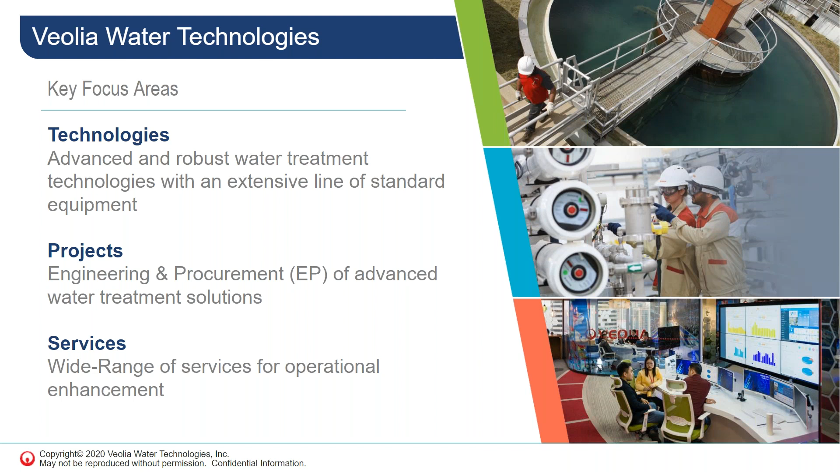And without further ado, I'd like to introduce today's panelists that we have here today to share their knowledge about the topic. Our first panelist is Christian Scott. Christian is the Director of Strategic Market Intelligence. In addition to that, in connection with Veolia's Centers of Expertise worldwide, he is also the Product Manager for the Actiflo family in Canada. He graduated in civil engineering from Polytechnique in Montreal with a specialization in water treatment.

And Christian Scott has also completed graduate studies in engineering project management. Prior to Veolia, he worked 11 years in consulting engineering, designing and implementing a wide variety of projects in municipal drinking water and wastewater treatments, as well as industrial process water and effluent compliance for reuse.

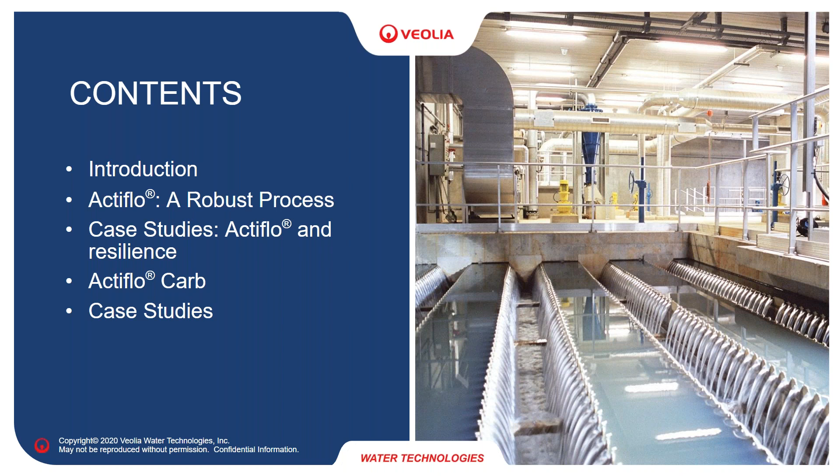We will start by looking quickly at some definitions of resilience and then go through examples where a proven technology with decades of experience in North America, the Actiflo, shows its relevance for these very modern challenges. I will, after, hand the presentation to Reed, who will present another member of the Actiflo family, the Actiflo Carb, that can provide additional solutions to go further in that mission.

Resilience. Wiktionary gives this psychological definition: the ability of human beings or a society to withstand a brutal ordeal and take advantage of it to strengthen themselves. What can this mean? How can we do this for a city? How can a city be more resistant to shocks, risks, particularly climate change?

Veolia was presented to you. Veolia has the specificity of being a company that's not only a technology company, but has a lot of operation experience for more than 165 years, being responsible for utilities in many places and operating them and sometimes even owning them. This is a very important question they had to look at. And one of the answers and one of the definitions they give is anticipating risks rather than just reconstruction, a logic of prevention, an ability to work together to make risk a growth opportunity.

Water treatment utilities specifically face different challenges. We see more and more floods that have a big effect on raw water quality, increase of solids, also organic matter. We hear in the news all over the world about forest fires that are more and more frequent and important, that have the same effect. We also hear more and more about the presence of algae, often together with their toxins.

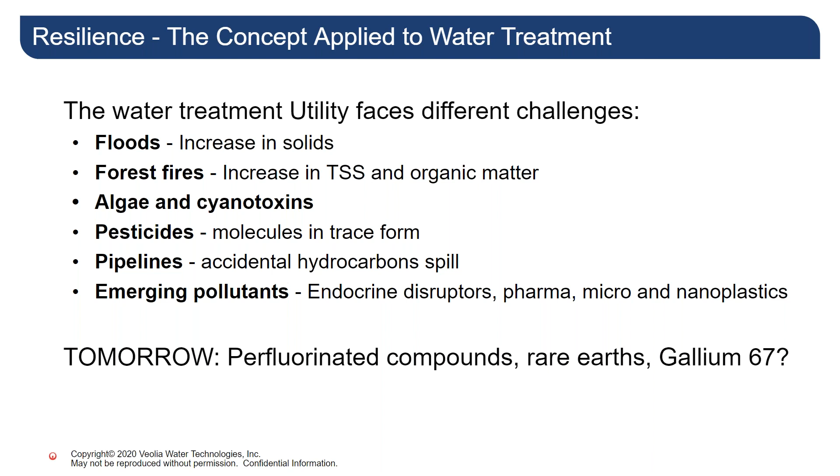And another way where resiliency is important to take into consideration, there is more and more presence of pesticides. There is risk of hydrocarbon spills from pipelines, and the presence of emerging pollutants, endocrine disruptors, pharma, micro- and nanoplastics. And we see more and more also PFAS, PFOS, rare earths. We're talking about more things that we will have to take care of in our water treatment.

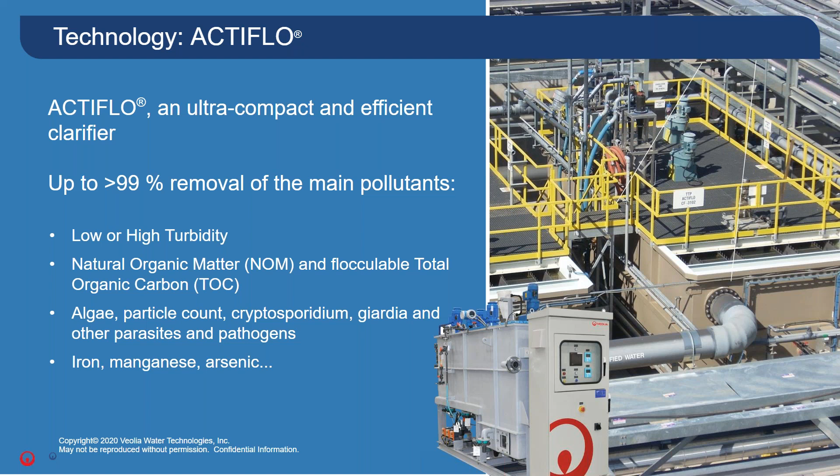Actiflo is a well-known process in North America and in the world. But I will still take some time to look at its specifics and see how it can relate to the question of resilience. The main characteristics of the Actiflo technology: we know its compactness, but also its efficiency, very efficient on a high range of conditions, and also its versatility, being efficient on turbidity, organic matter, and many other compounds. Let's take a little time to understand the technology as such. It's ballasted floc clarification.

The first step, which is a coagulation tank, or sometimes even in-pipe coagulation, is where the chemistry is happening. There, depending on the quality, on the type of water, the right chemistry has to be determined, often by jar testing, by piloting, or now also by experience, so that we get creation of flocs that are optimal at this step of the process.

This section is also where all the versatility of the technology is happening, because any type of chemistry can be applied to the technology. We are applying Actiflo in drinking water, wastewater treatment, wet weather treatment, and a lot of experience also in mining for metals removal, softening, etc. When the chemistry in the first step of the technology has been determined and rightfully executed, then the water goes to the second tank, the flocculation tank. Here, it becomes specific.

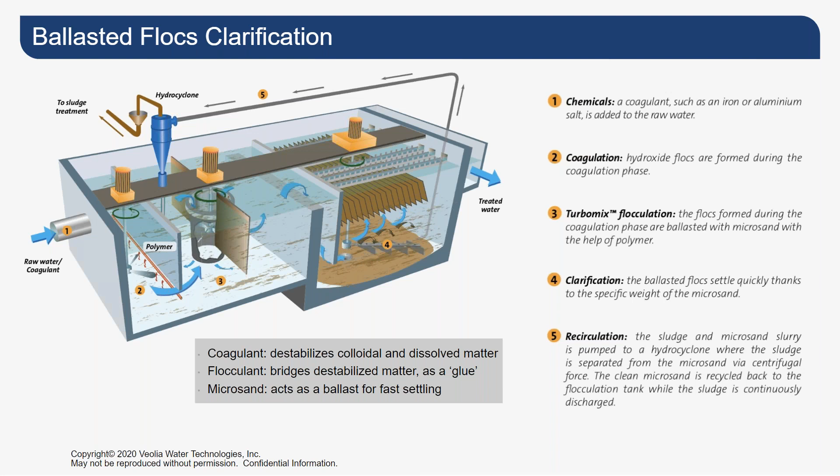The major advantages of the technology are its robustness, process stability. Because one thing I did not mention, in the maturation tank, you get a very high concentration of solids by the presence of microsand. The solids can get up to 5 to 10 grams per liter, 10,000 milligrams per liter. So if there is a variation of solids at the entry from 50 to 1,000, it's very little compared to the mass, the inertia of solids in the system, which makes it very stable.

Performance is proven to be very high in a great range of turbidity, TSS, and pollutants. And also, this system has very short hydraulic residence time. The first tank of coagulation is about 2 minutes or less. Flocculation, 6 minutes or 4 minutes or less. And very quick clarification. So the start and optimization of the treatment process is very quick. You start the system and you know in a few minutes what the result will be, and if the chemistry needs to be adjusted in case of a sudden change, let's say, of raw water quality.

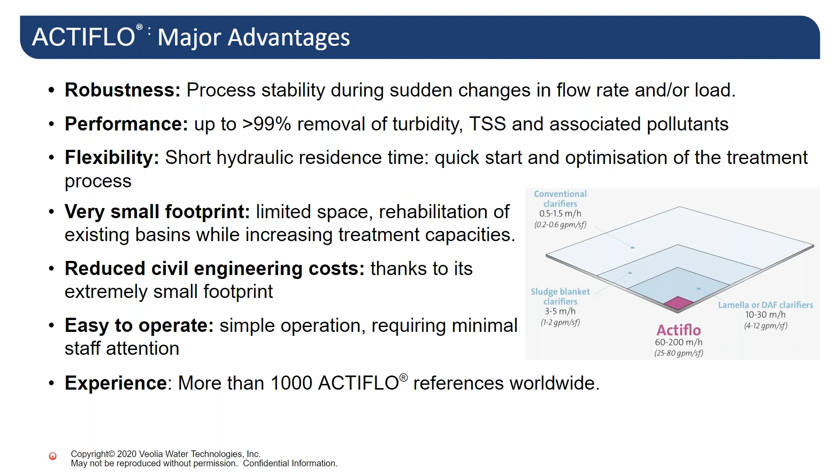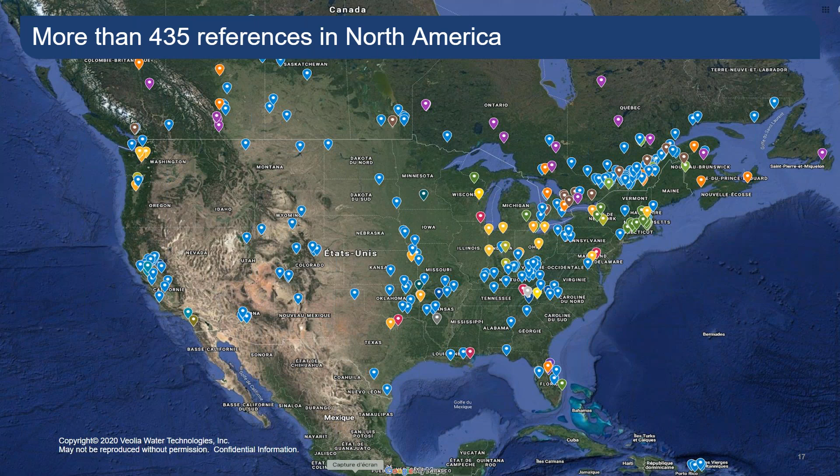When we are talking about the robustness of the process and the link to climate change conditions, one of the first, if not the first, climate change impacts I listed earlier were floods. Well, Actiflo has had the occasion to show its performance during many floods in Canada and in the United States. I put forward the example of the city of Red Deer, which is a medium city in Alberta between Edmonton and Calgary, where there was very important flooding in 2005.

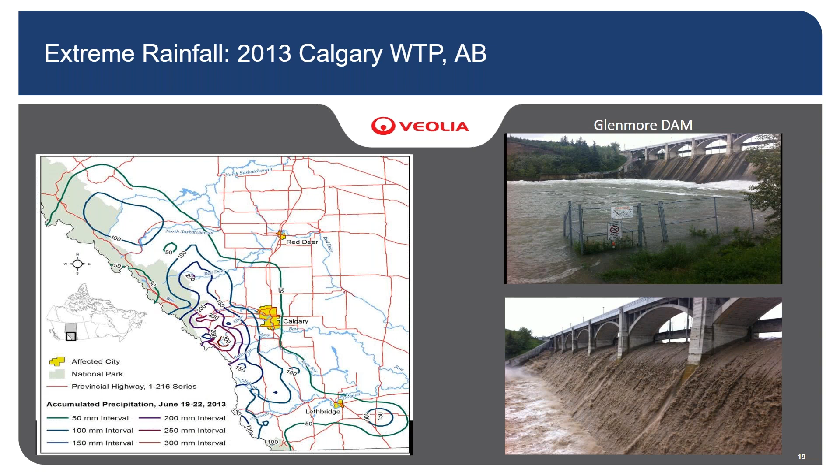During that time, many of the plants in Alberta were shut down because of the bad raw water quality. It was just at that time that the city of Calgary decided to install Actiflo technology at its two drinking water plants of Bearspaw and Glenmore. It was, I think, a good thing, as here you will see there was another extreme rainfall in 2013. And on the right-hand side, you will see the water going over the Glenmore Dam. The water ahead of that dam is the raw water for the Glenmore plant. So you see the color, the quality of that water.

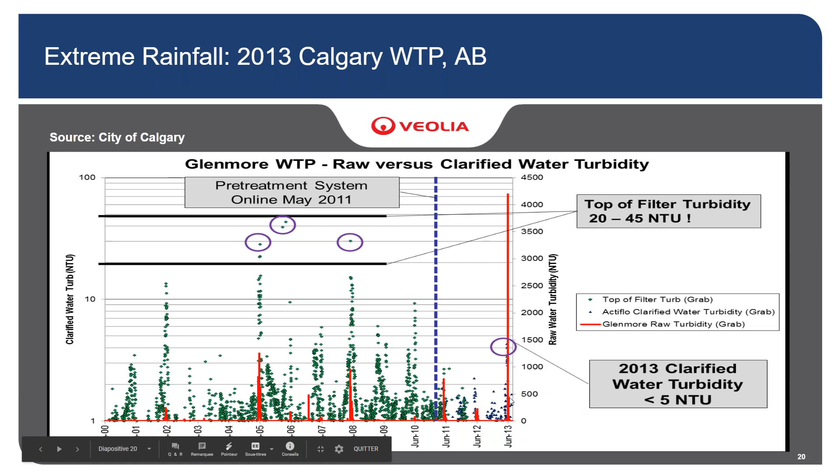Another example of the Actiflo robustness in link with climate change impact: wildfires. You maybe heard about the 2016 Fort McMurray wildfires. Fort McMurray is the oil town for the oil sands in northern Alberta. A third of the city burned down in 2016, with a dramatic effect on the water quality. Not only that, everybody had to evacuate the city for a very long time, and it's the event that had the most damage in the history of Canada.

Even with the raw water very much degraded, the city was able to operate at 150% of the design capacity for the fire fighting. Now we see that the Actiflo had a very good response to the dramatic increase in solids, which is one of the effects of a wildfire on a watershed. We also know that in the short and long term, there is an increase of dissolved organic carbon in a watershed that has been affected by wildfires.

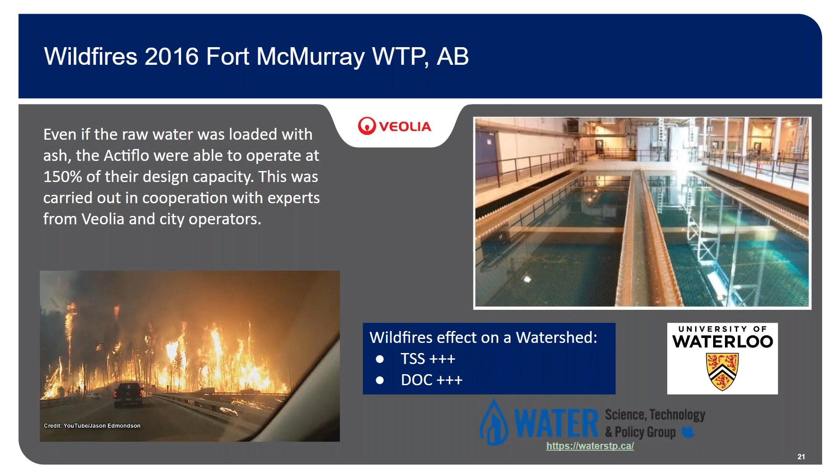We are currently participating in a study of the University of Waterloo that is looking at the best ways to treat water after a wildfire. We have had some tests on the solids and are looking forward to testing activated carbon to complete. The first set of results will be published by the Water Science, Technology and Policy Group, and you can look for that coming soon at the address in the presentation.

2016, in Saskatchewan, a pipeline oil spill at the city of Prince Albert, which is equipped with Actiflo. In a few days, the city had to change water source from the North to the South Saskatchewan River, with pipelines of raw water going to the plant, with a dramatic difference of quality between the two rivers. With the Actiflo, they were able to optimize the chemistry and get the same water quality for the city during the time that the normal raw water source was cleaned up and ready to be switched to a bit later.

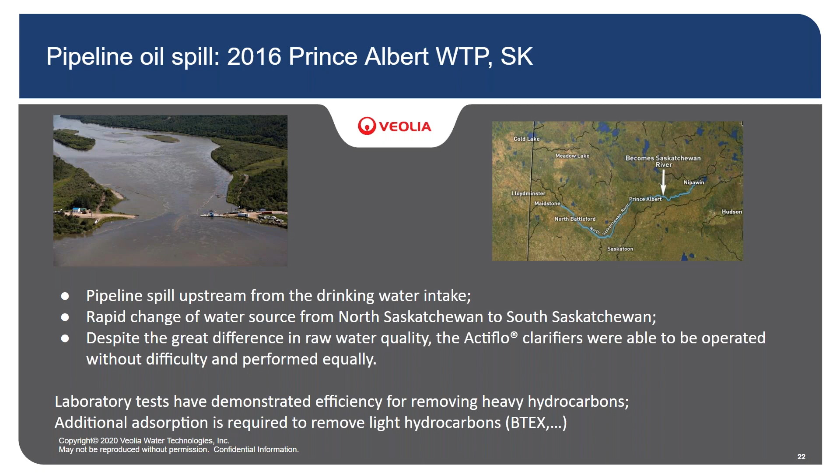During that time, we've done some lab tests on hydrocarbons removal, and we could validate that the Actiflo was very efficient on removing heavy hydrocarbons, because that spill was of heavy oil. However, we know that Actiflo, as any clarification system, will not remove light hydrocarbons like BTEX. Here again, adsorption could come and help for that.

Algae: we have experienced north of Montreal a very high bloom of algae in 2005 because of a dam that spilled a sudden quantity of algae. All the plants on the river had difficulty producing the quantity of water, and some were shut down. But the Actiflo we were testing for government approval at one of those plants that was shut down had zero effect on its operation.

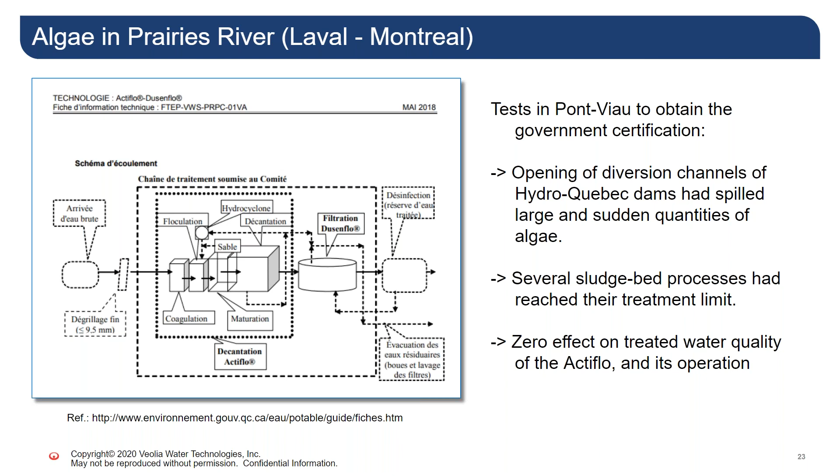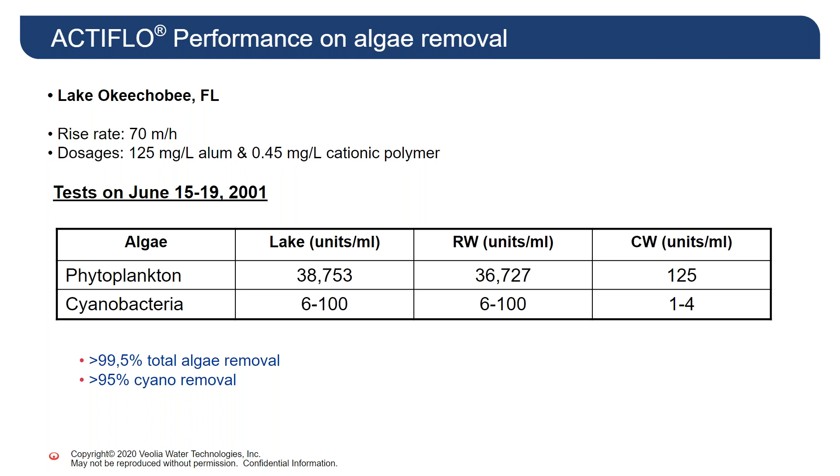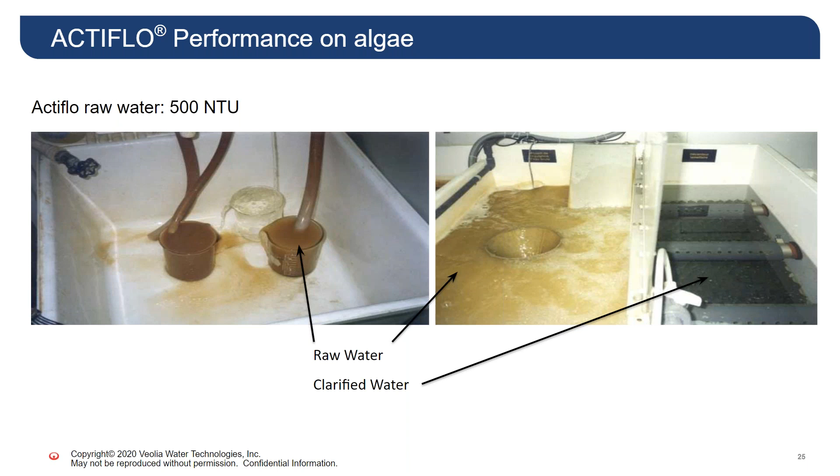Algae removal is one thing. We also have to think about cyanobacteria toxins; there might be toxins coming with the algae. We know that Actiflo and membranes will remove algae.

We know that Actiflo and DAF have a very high water production security. Sometimes membranes may show a decrease in the fluxes, and for the worst blooms even have problems continuing functioning for some time if not attended to as they should.

We also have to think about toxins that come from cell lysis. There is research showing that in sludge blanket technologies where there is a high concentration of cells, this situation may favor the lysis of cells and release of toxins. In some membranes too, other studies show that the pressure on the membrane may also favor cell lysis. We have to be very careful about this element in design.

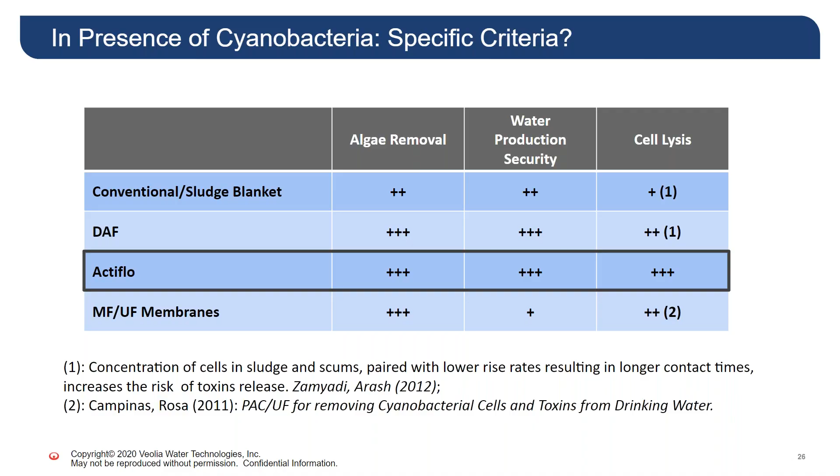For the Actiflo, the cells will be removed through the hydrocyclone and eliminated very quickly from the system. But here again, the Actiflo will not treat the toxins for sure. So there are other processes for that, and here again, PAC and adsorption are a good solution. So this brings us to the moment where I will pass on the presentation to my colleague Reed, who will talk to you about Actiflo Carb, which adds adsorption to the system.

Yes, thank you, Christian. Staying with that theme of resilient technologies and shifting focus to Actiflo Carb. For those of you not familiar with Actiflo Carb, it is a combination of Actiflo and all the benefits Christian just talked about in terms of a robust, very adaptive technology, combined with the adsorption capabilities of powder activated carbon. Powder activated carbon is well known for its efficiency in removing things that are typically more challenging to remove through just coagulation and typical water chemistry alone.

Some of that focus is on the lower molecular weight organics, algae, and especially the toxins, as Christian alluded to earlier. PAC is very adaptive in removing those toxins, taste and odor, pesticides, hydrocarbons. And powder activated carbon is very efficient in terms of emerging micropollutants as well: personal care products, pharmaceuticals, EDCs, things present in our watersheds that we don't like to talk about, but carbon is very effective in their removal.

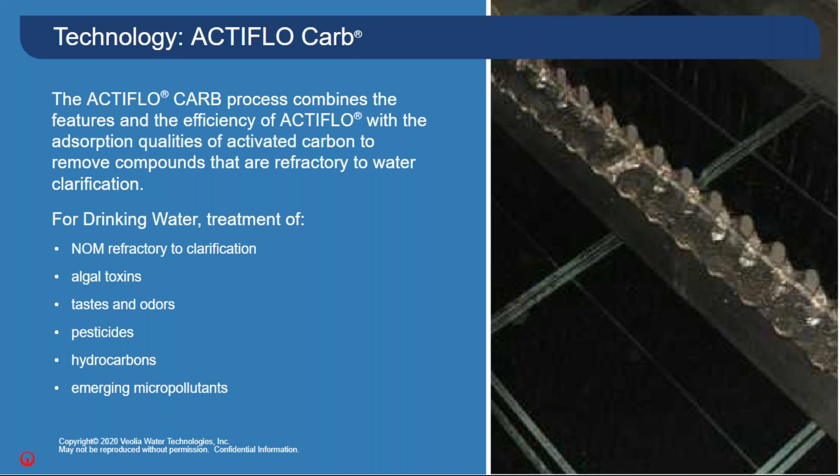So how does Actiflo Carb work? How does it combine these two technologies? Taking the PAC dose upstream, putting it through an adsorption tank upstream of the ballasted clarification process, including a PAC recycle, which I'll talk a little more about. The combination of those two affords Actiflo Carb a more effective use and a continuous removal of those compounds compared to once-through carbon systems, where carbon is dosed, passed through the process once, and then removed. So Actiflo Carb combines an adsorption tank and a recycle of that carbon to fully utilize and maximize the adsorption sites of the PAC.

And then just like ballasted clarification and Actiflo, those PAC particles are coagulated, flocculated, bound to that microsand, and settled out quickly and efficiently, allowing for a very high throughput in terms of gallons a minute per square foot, and a very compact footprint as well.

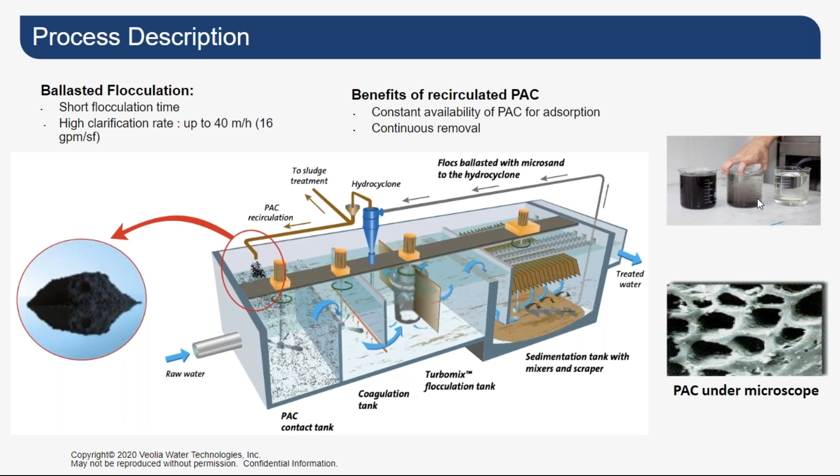And why does it work? Actiflo Carb inventories a very large amount of carbon. Typically, based on the application, it maintains about 1,000 to 2,000 milligrams per liter of carbon within the system. This large inventory, along with the adsorption tank and its residence time, including PAC recirculation: as the ballast drops out with the PAC, we separate the ballast, return it to the Actiflo portion of the process, and the carbon is reused and recycled back to the adsorption tank. Oftentimes this results in a PAC age of 18 to 24 hours, fully utilizing the adsorption sites and reducing OPEX in terms of fresh PAC dose compared to once-through systems.

And again, much like Actiflo, Actiflo Carb takes advantage of ballasted high rate clarification. It's able to do that in a very small footprint and high throughput, 12 to 16 gallons per minute per square foot, or 30 to 40 meters per hour.

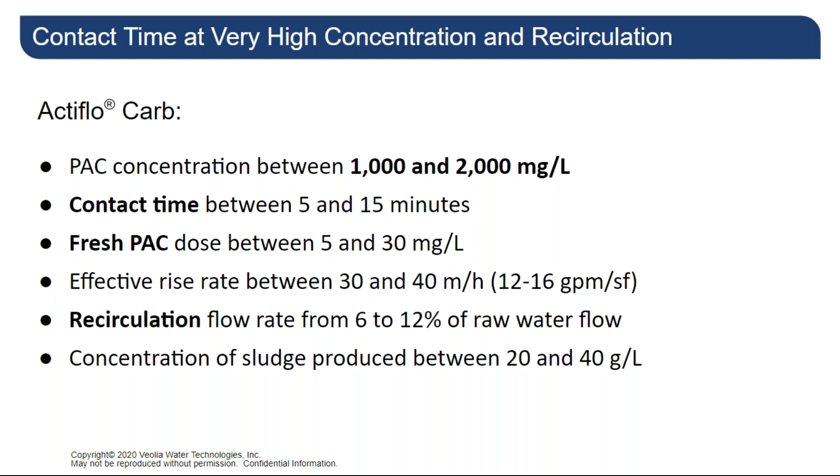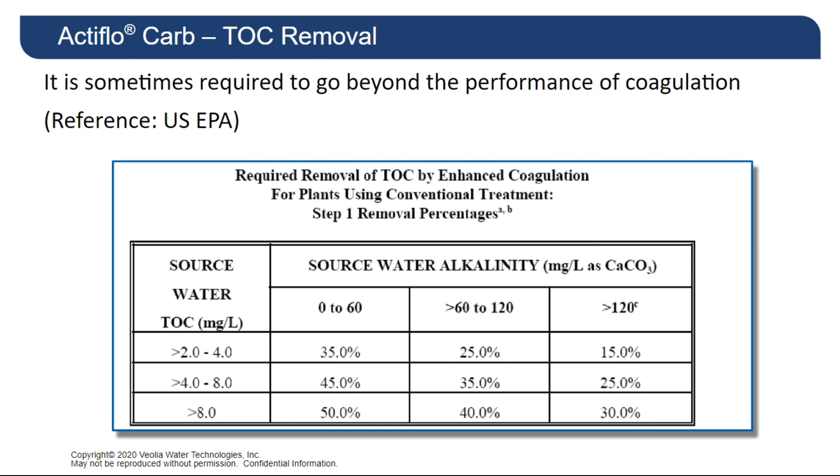So as mentioned, organics is a primary focus with carbon, and for Actiflo Carb. When we look at organic removal, at least in the US, the EPA has established guidelines for what enhanced coagulation should do for a given watershed and utility, based on Stage 1 and Stage 2 guidelines for disinfection byproduct formation. It's a function of your influent TOC and influent alkalinity in terms of the anticipated removal with coagulation alone. So the question becomes, for your utility, what happens if coagulation isn't sufficient to meet my DBP?

And there are a lot of factors that play into that in terms of the compounds and constituents that you're dealing with in your water source, but also your distribution system plays a large role in that. And what we've seen is a simulated distribution test, essentially quantifying the formation potential for DBP, your THMs, your HAA5s, as it portrays against TOC and effluent TOC.

So in this example, 80 and 60 microgram per liter is the threshold that we're focused on, the MCL, so to speak, and then plotting that against TOC values. And for this example, in order to meet that 80 or 60 microgram per liter threshold for your DBP formation potential, you have to be, in this case, less than 2 milligram per liter of TOC. And again, this is very dependent and is going to vary from site to site.

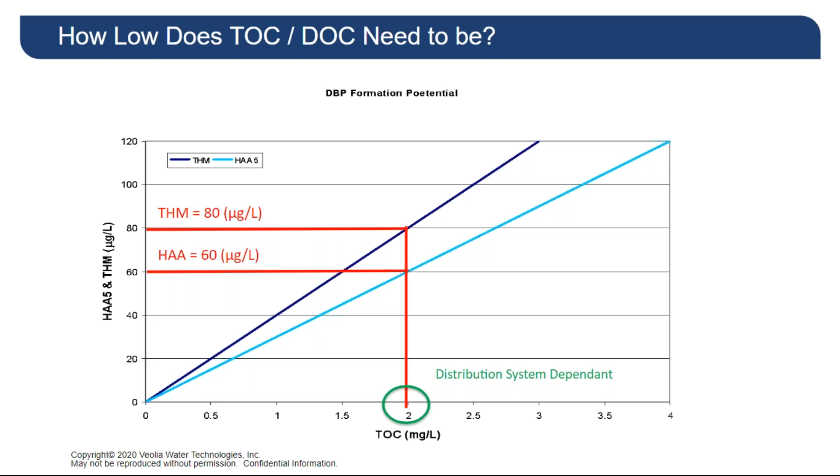As mentioned, PAC has an affinity for a multitude of things. And what I talk about next is taste and odor and pesticides. This is a facility in Indianapolis. It is a seasonally operated Actiflo Carb system specifically for the seasonal spikes that this facility sees, primarily during the summer, early fall period with respect to geosmin and MIB. Taste and odor issues, as well as pesticides that this facility sees due to runoff.

This is just showing you some of the data associated with this site with respect to taste and odor. The geosmin and MIB data here is actually a spike test that was conducted in the pilot trials prior to installation of Actiflo Carb, looking at varying influent characteristics up to a few hundred milligram per liter, and the ability of Actiflo Carb to provide a very low and consistent effluent quality as influent concentrations increase.

And then also looking at the pesticides removal, various compounds, and the ability of the carbon in the Actiflo Carb to produce 68 to upwards of 98% removal, sometimes below minimum detection limit or limit of quantification for each of those compounds.

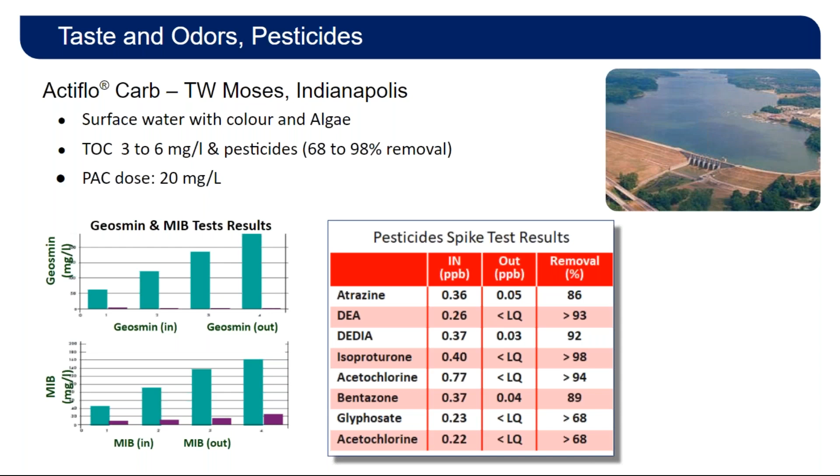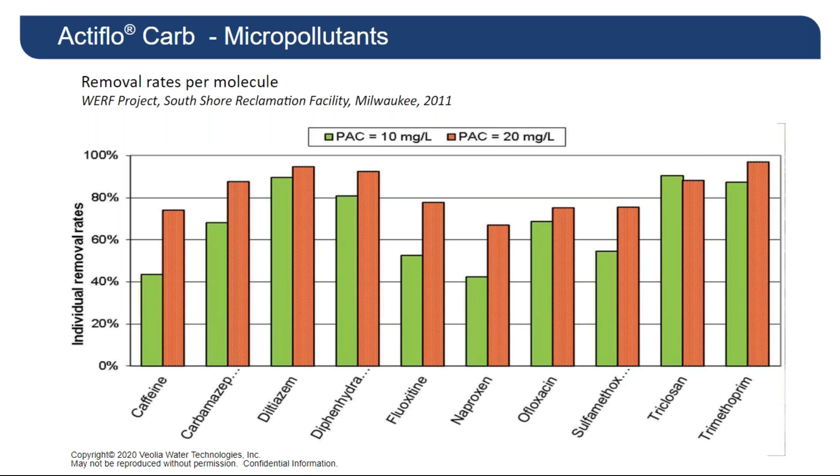And I would like to highlight, what if your water source is a little more challenging, whether it be high influent solids, maybe a higher concentration or a more challenging type of organic, or the combination of high TSS as well as the challenging characteristics of organic matter as well. Veolia has a solution. Typically, because of that, coagulation isn't sufficient enough to meet water quality demands, and so a two-step or a two-stage process typically is required.

And Veolia deems this as Actiflo Twin Carb, where we look at Actiflo as primary clarification ahead of Actiflo Carb, focusing on the constituents within the watershed that are easier to remove via just coagulation alone. Turbidity, the higher molecular weight organics, color, you'll get some algae removal as well, iron and manganese that have precipitated. And then this clarified effluent then passes through the second stage Actiflo Carb process.

And PAC is not selective. It will try to adsorb whatever's in this raw water that you send to it. And in very challenging water sources like this, you want it to focus on the more challenging compounds. In this case, after primary clarification, it now gets to focus on those challenging organics, the low molecular weight microorganics, pesticides, taste and odors, EDCs, and those micropollutants that we talked about. So it really allows carbon to do its job on the things that, say, conventional coagulation through a high rate ballast clarification process isn't as efficient in removing.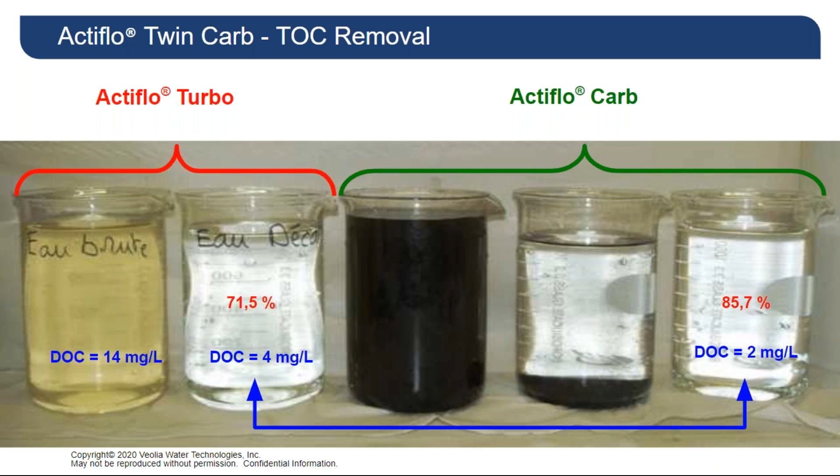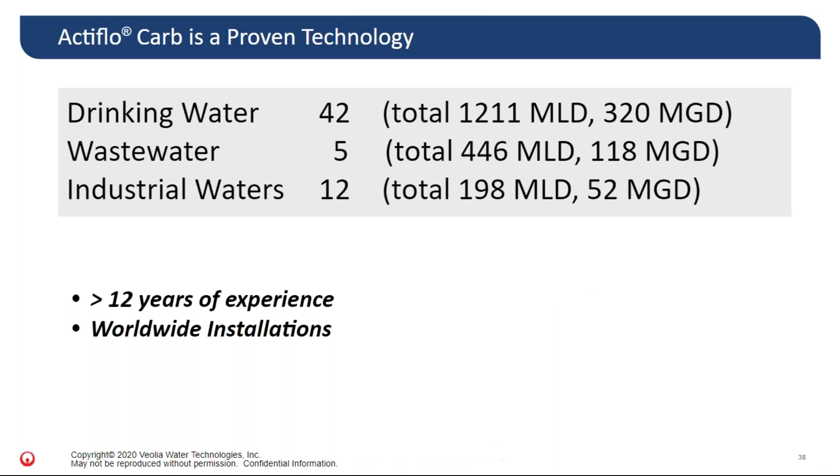So I want to shift focus a little bit to examples where Actiflo Carb has been applied. I just want to highlight the experience Veolia has globally, pushing 60 total installations, over 12 years of experience globally with Actiflo Carb. From our smallest installation, around 1 million liters per day or just a few hundred gallons a minute, to our largest installation, pushing 250 MLD or about 66 million gallons a day.

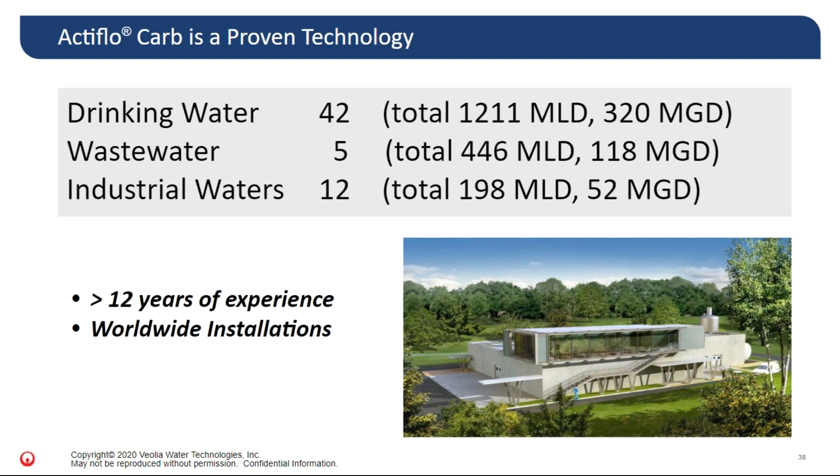And if we take a look at the North American references, we currently have 5 in operation, and we'll spend a little more time on most of these on the next adjacent slides here. I do want to highlight the pilot tests as well. We've done 12 to date in North America across a wide range of applications.

Drinking water, typically focused on organic removal, taste and odor, algae and its associated toxins, as well as pesticides. And then when we start to look at reuse applications or municipal wastewater applications, those are primarily focused on what Actiflo Carb can do with respect to micropollutants, emerging compounds, pharmaceuticals, EDCs, things like that.

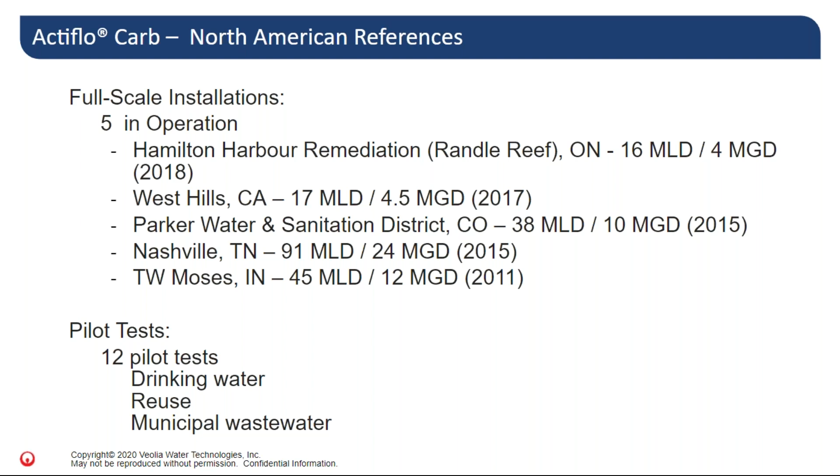First reference I want to talk about is Randle Reef in Hamilton, Ontario. It's a rehabilitation project of the Hamilton Harbour, just south of Toronto. Hamilton Harbour is fed by Lake Ontario, which over the years has had a large influence of industrial discharge that's resulted in pollution of the Hamilton Harbour. This is a federally funded project focused on the removal of polycyclic aromatic hydrocarbons from Hamilton Harbour, which are essentially byproducts of burning coal and oil and gasoline.

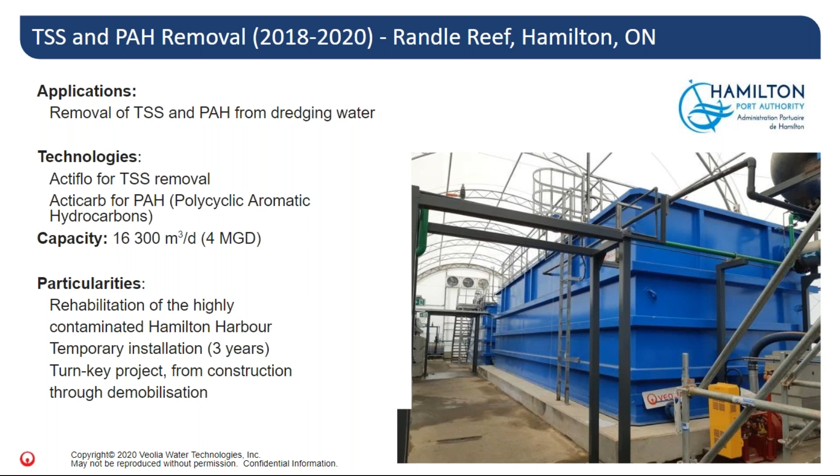As mentioned, this is a federally funded project, based on the removal of dredging water pulled from Hamilton Harbour. The city led with Actiflo and Carb to help them as part of this rehabilitation project, focusing on not only removal of suspended solids, but also those hydrocarbons through the second stage Actiflo Carb process.

Taking a look at various compounds of those hydrocarbons and their associated discharge limits, this is 2 years' worth of data so far. You can see Actiflo followed by Actiflo Carb has been very successful at meeting those discharge limits, and in a number of cases, especially the fluorene graph here, the ability to meet and exceed well beyond those discharge limits in terms of the removal of hydrocarbons.

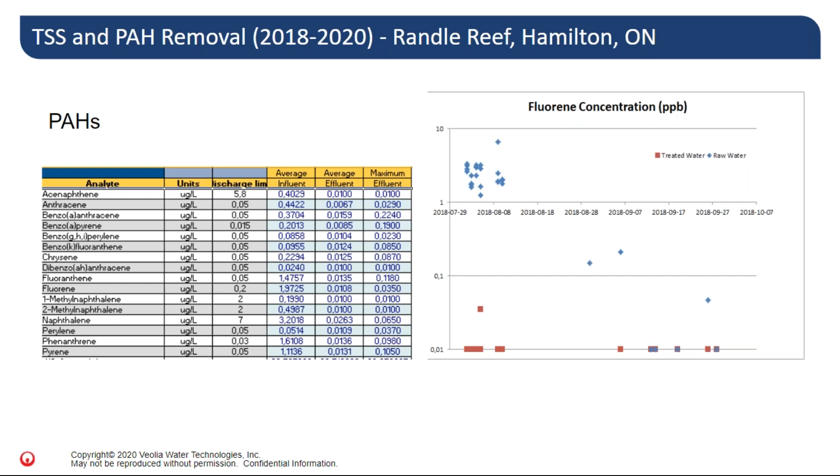Switching focus a little bit to a few U.S. installations. The first one being Nashville, Tennessee. It's a 23 MGD or 87 MLD Actiflo Carb facility as pre-treatment to microfiltration membranes. As a result of it being pre-treatment, there is an intermediate filtration step that includes Hydrotech disc filters, 10 micron woven cloth media, prior to these membranes.

Actiflo Carb is seasonally used in Actiflo Carb mode. And when I talk about Actiflo Carb mode, one of the benefits of Carb is you can transition between Actiflo, in terms of ballasted clarification and high rate clarification, and Actiflo Carb. So this facility, especially in early spring, will operate as needed in Actiflo mode. And then starting late spring through fall, transition into Actiflo Carb mode and operate pretty much 100% of the time in Actiflo Carb mode.

And its primary focus is removing those constituents that they see seasonal spikes in that are prone to create challenges from a membrane perspective. We talk about organics and DBP formation, but also mostly focused on taste and odor, and then they do see seasonal spikes in algae as well.

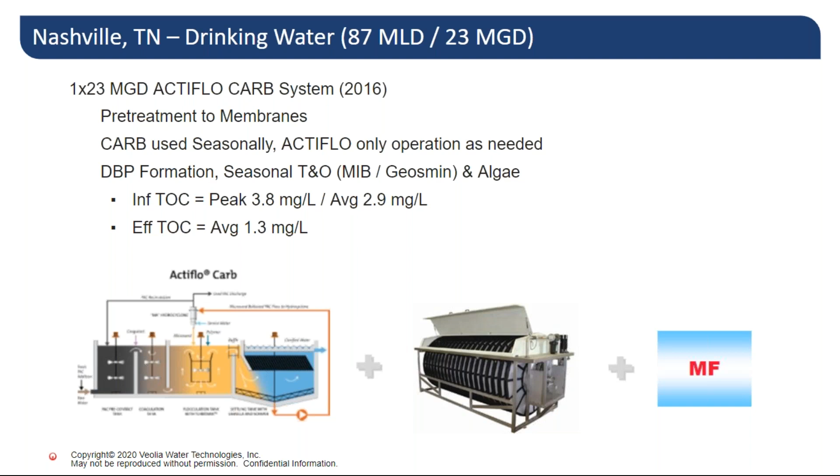Taking a look at a relatively typical season for Nashville and their water source, as mentioned, Actiflo is direct clarification, so there's no upstream clarification step. When they transition into Actiflo Carb, because it is the combination of the adsorption step and the high rate ballasted clarification step, Actiflo Carb is essentially a clarifier. And so not only is it great at removing compounds that are more challenging and maybe require adsorption to remove, but it's a clarifier and will also remove the suspended solids as well.

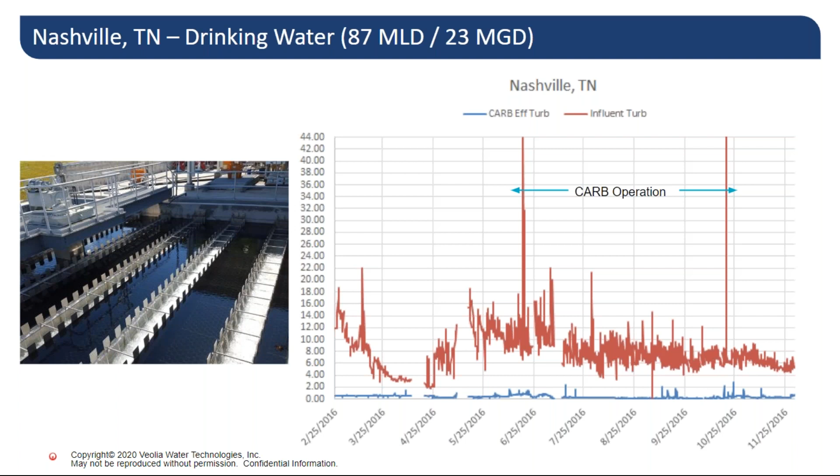Taking a look at another facility in Central California, the West Hills Water Treatment Plant. This is a district that's pretty much predominantly focused on groundwater. They had an increase in demand, and were looking at alternative ways to limit their impact on their groundwater wells. So they shifted focus to two local reservoirs, San Luis and San Justo, for their expansion plant. Both these surface waters were challenging in terms of TOC. They're prone to manganese and iron challenges at various periods of time, but also bromide, which made it very challenging in terms of DBP formation.

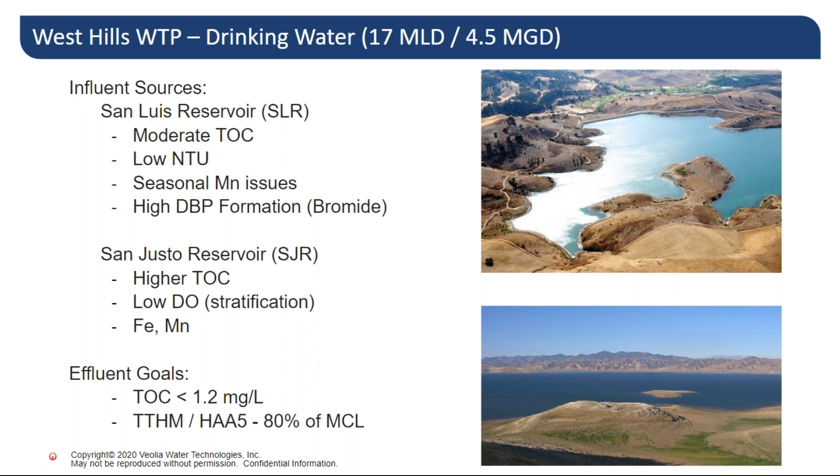It was an extensive upfront effort with their consultant, HDR, to look at both source waters at different times of the year. They did a lot of jar testing and pilot testing to quantify what effluent TOC they needed to achieve with Actiflo Carb, with their goal being 80% of their MCL, so 80% of the 80 and 60 micrograms per liter. And based on the pilot and jar testing, they arrived at needing to meet 1.2 milligrams per liter for effluent TOC to ensure they meet their disinfection byproduct formation.

This plant was commissioned in 2017. This is the first few months of operation the following year. Just looking at, again, the influent TOC in blue, and then the corresponding effluent TOC. Again, Actiflo Carb successfully as a direct only clarification step, treating directly off these reservoirs, meeting that 1.2 milligrams per liter that they targeted to ensure that they meet DBP.

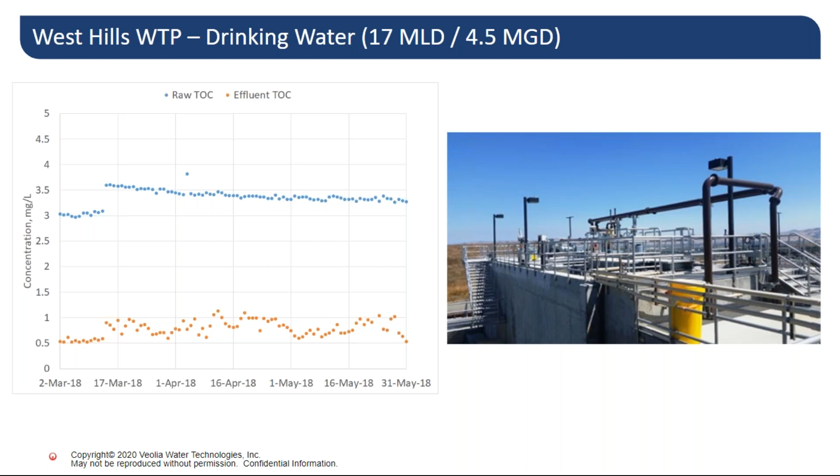And then wanted to focus on another facility. This one is in the western coast of France, the La Roche water treatment plant. Very challenging water source, and it's the reason we wanted to highlight this. You can see the variability that they see. It's fed by two different rivers, very turbid, prone to not only turbid spikes in terms of solids, but also TOC, upwards of 20 milligrams per liter at times. Also prone to high iron and manganese, very challenging source water. And then they have runoff as well that is prone to seeing spikes in pesticides.

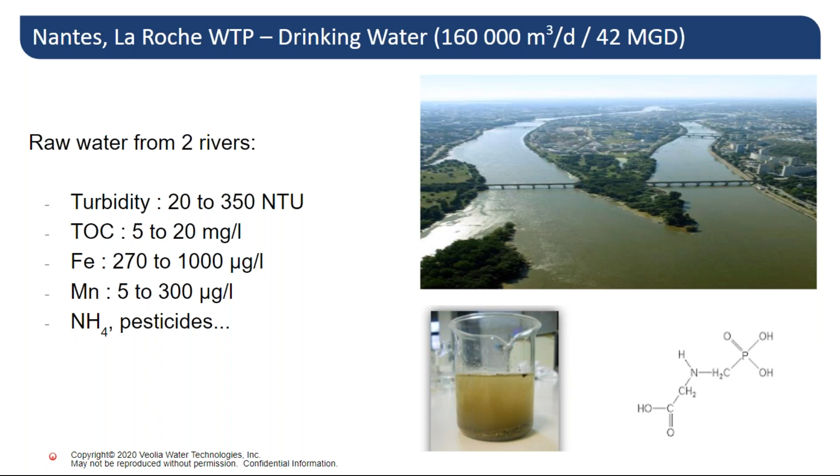And given all this, and to meet the city's goals, they chose to proceed forward with what we call the Actiflo Twin Carb, which again is Actiflo as primary clarification, followed by Actiflo Carb. They chose pre-ozonation just upstream of the Actiflo, again with the focus being on those constituents and compounds that can be removed through coagulation. So high TSS and this variability that these two water sources see, the metals in combination with the ozone, the color, to provide a good initial clarification

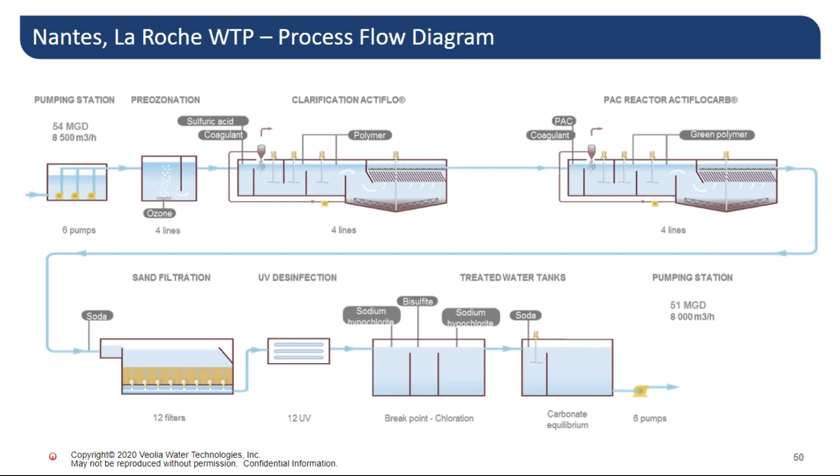and allow the second stage Actiflo Carb process to focus on the more challenging compounds, the low molecular weight organics, the pesticides, and really allow the most advantageous use of that fresh PAC dose upstream on those conditions that are difficult to remove through coagulation alone before this water is then sent to sand filters and UV disinfection.

Taking a look at some of the organic carbon that they see, again, two different water sources, two different rivers, high variability in those organics, upwards of 10, 11 milligrams per liter, and the ability of Actiflo followed by Actiflo Carb to help the city successfully meet their ultimate goal, which is around 1 milligram per liter of TOC.

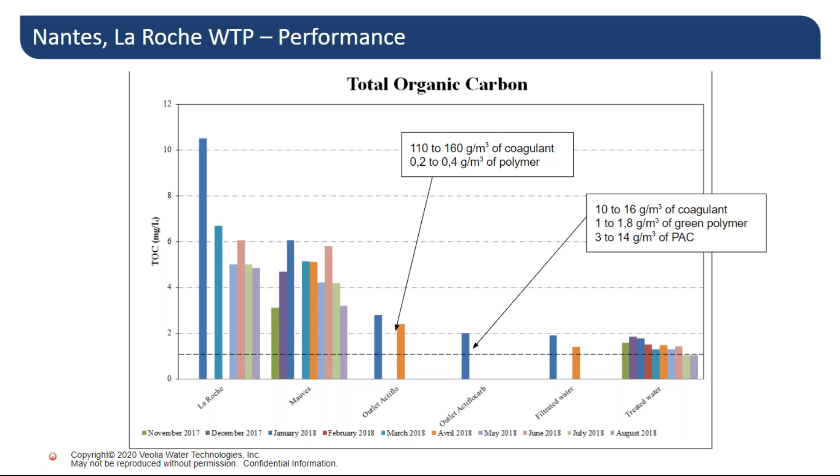And then in conclusion, just to kind of wrap things up, I know we're running a little bit late on time here, but climate change is difficult to predict. It can and will likely lead to unforeseen challenges with raw water sources. As Christian mentioned, this can come in a variety of ways: flooding, forest fires, and associated variations in suspended solids and DOC content. It could also be agricultural runoff as well.

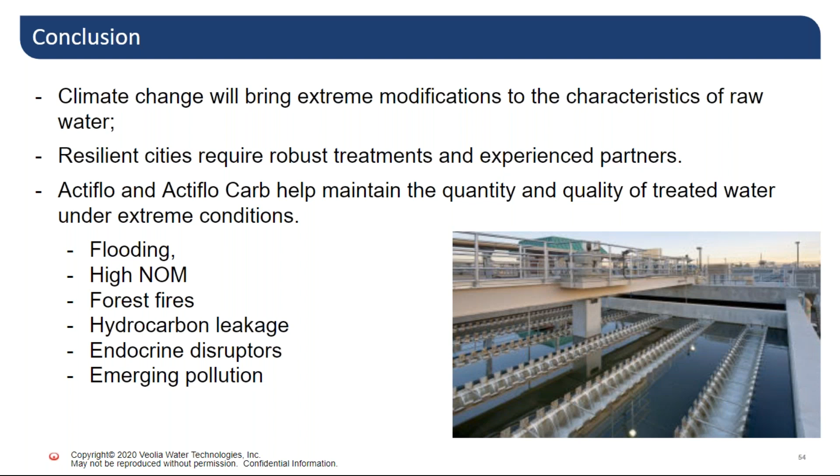Veolia can help. I think that's key here, that we can help. We have the experience, we have the proven and robust technologies with Actiflo and Actiflo Carb to help utilities be more resilient and adaptable to these changing conditions. And with that, I thank you for your time.